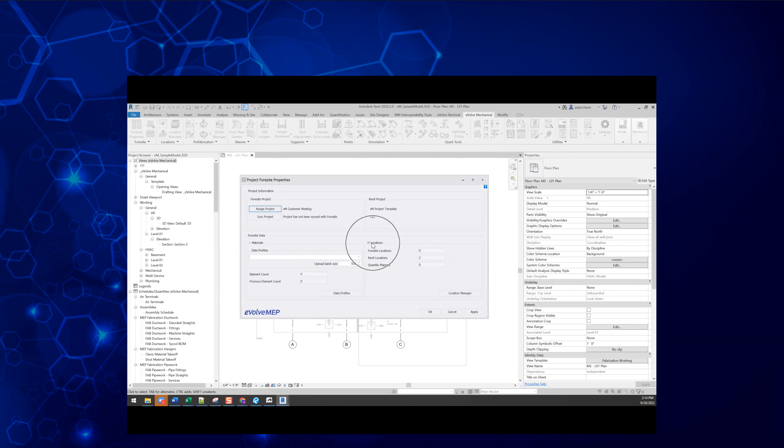And you'll see I have a locations panel here. So I'm going to turn off materials right now because I don't want to use it, and I'm going to keep this activated. And now when I hit sync project, what you'll see is I have Foresight locations, Revit locations, and quantity mapped.

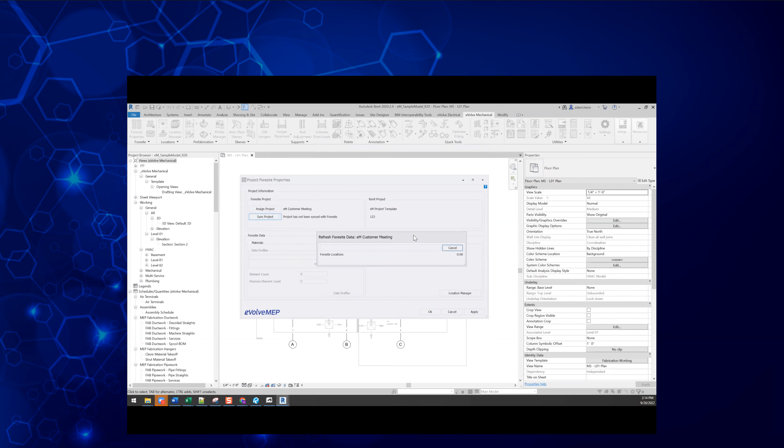When I actually sync this, you'll see the Foresight locations will bump up. So now I have 5 Foresight locations and 2 Revit locations. So what this is telling me is on the website, the project I set up, I created 5 different location zones, or however you want to think about it. In Revit, it's basically counting my locations using our location manager tool.

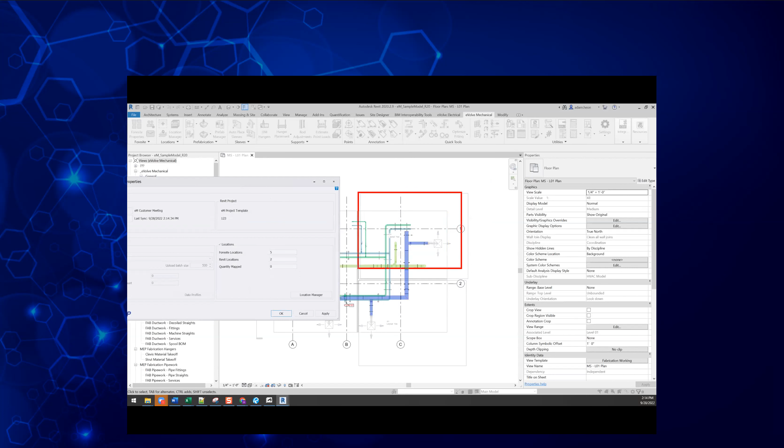So there's 1, there's 2. So it's basically saying, hey, you have 5 on the website, you have 2 in your model. The quantity mapped is the ability to connect those 2. So out of the 5 locations...

What is this? So the way we kind of map locations is in the location manager here. So we created a quick access to it. So I pull up my location manager. So you'll see in my model, I made 2 locations, which are those boxes in the background there, A1, B1. So in my mind, I probably would have called it 1A, 1B, but you know, A1, B1. So first floor A, first floor B.

You'll see with the location manager, I have a Foresight location column. Now, if I hadn't mapped anything, this would just be a blank cell that you couldn't do anything with. But now that I've mapped, I have a drop-down menu, and you'll see the kind of relationship of the 5 areas that it's saying I have. So I have floor 1 area A, floor 1 area B, 2 and 2A.

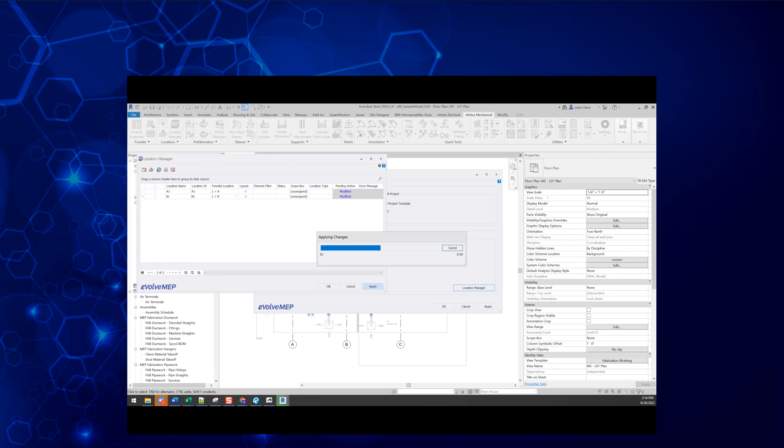So what we're doing here is basically just assigning this, like, okay, well in my model it's called A1. Well what is that? Oh, it's level 1 area A. And again, for B, it's level 1 area B. So I apply that, and now I've mapped those locations.

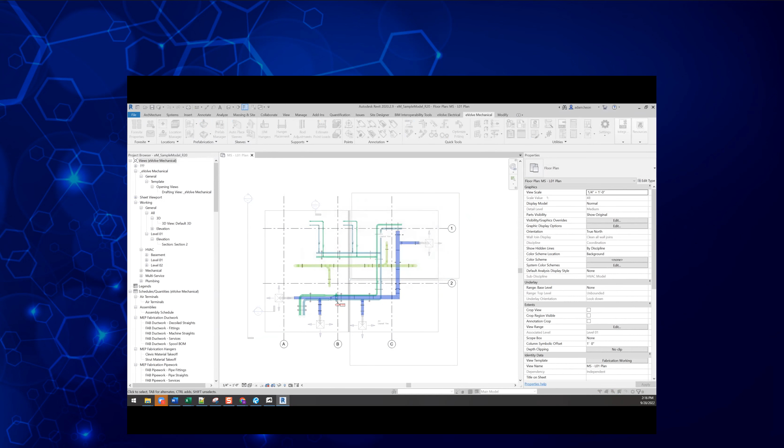So now you come back here, you'll see 2 areas of our locations are mapped. Now, once I've mapped those, in order to assign all the elements within that space, I have to use my assign location function here. So I'll go ahead and run that, and I'll just do entire project here. I get my warning, it says it may take a long time.

And they're mapped. So when I click on an element, what you'll see is... there it is. So we have a parameter.

We'll actually have two location parameters. One is the location parameter for just Revit, which is what I call B1. The other location parameter is my Foresight ID. So you don't need to use the website to do a location tool or any of that stuff - if you're using the website, we have a specific field for that. This is going to be used for sorting and filtering and things in Revit, so we're just assigning the common parameter values.

But now I have basically my A1 area here, or this is B1 area here. So all the elements are in area B, and then all the elements are in area A here, and these are just unassigned.

So now that I've assigned that, the next thing I want to do in the next area that we have access to on the website is my takeoff pad. When I come down here - if you saw what we call our Gen 1 materials app, this is very similar to that. The idea behind the takeoff pad as it relates to Revit is basically being able to send your material quantities to a grid where someone can then take them to the next phase.

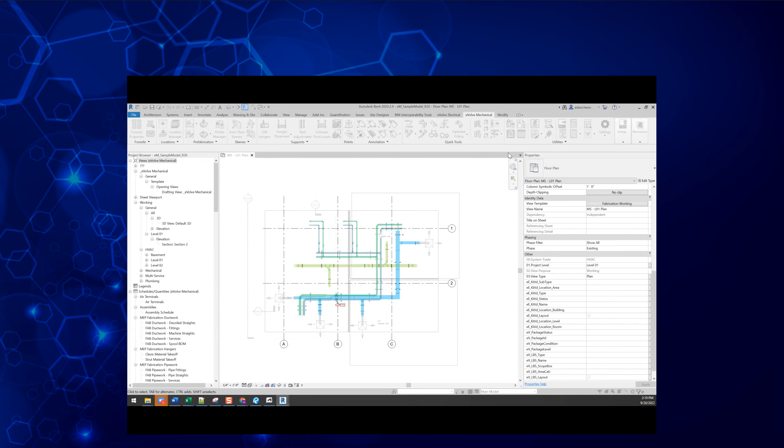So I'm not going to keep that off for right now. What I want to do is go through this profile. Just worth mentioning - I meant to say this at the beginning - the model I'm in right now is our sample project. For those who don't know, if you go into the admin module and go to your company properties, there is a download link for sample files. This is a self-extracting zip folder, and one of the things in it is a sample mechanical model that you see here. So everything I'm doing here is right from that model, and you can do it right out of the box because it's all pre-configured.

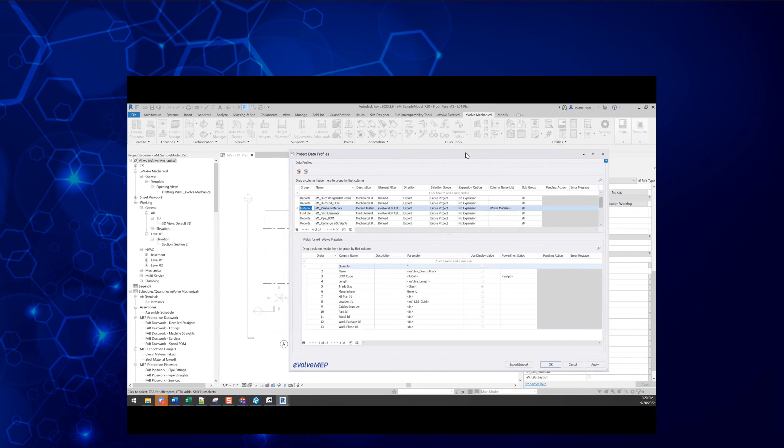All right, so back to the profile. What I want to find is my materials profile here. So just to start at the beginning, what is a data profile? What do we use it for? And what am I looking at on the screen exactly?

So think of a data profile as a way to define a container, and you can specify what elements go into that container, and then you can specify what parameters you start doing things with. So the top group here is a listing of all the different profiles. I have a materials profile here, and basically there's two main parts of a profile: your element filter, and I would say your selection scope.

You see here, the element filter is what you see everywhere in our product. It's the filter that actually tells you what elements you want to grab in this condition. So this one is just basically a bunch of MEP categories whose description is not blank.

The selection scope, as you drop down, is pretty straightforward. It's just how do you want to grab these elements? Do you want to grab the entire project, by view, by selection? Do you want to choose your method? For this purpose, for the materials profile, I'm doing entire project because I don't want to remove things - I want to send everything.

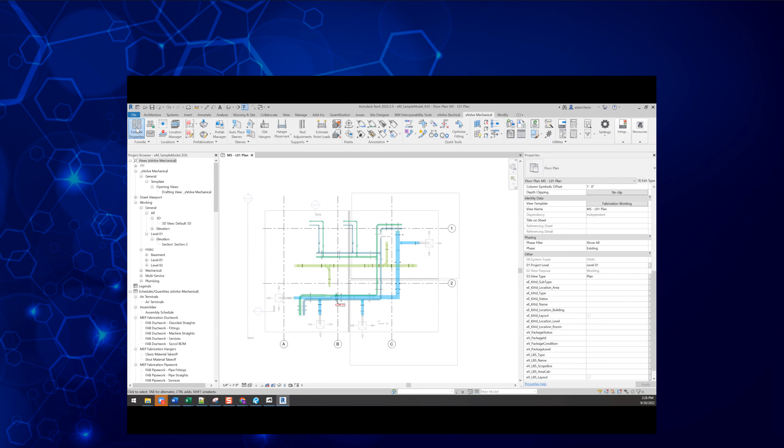I'm going to hit OK here, and go back to my Foresite properties and turn on this materials panel. By shutting these off, as you saw, it basically just deactivates them - you don't use them. If you don't set up anything on your project here, it doesn't pull anything in. If you don't set up profiles, it doesn't push anything out. So it still doesn't work anyway, but you can turn them off. So I'm going to turn on materials, and there's my profile.

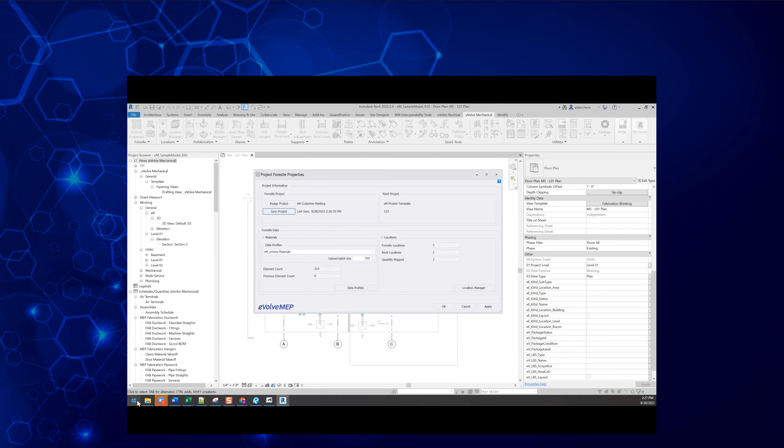I'll apply my changes, and now I'll do a sync. You'll see it'll do my locations first, and now it's coming back and doing materials. You'll see it sent 514 elements, and I'll jump back to my project here.

Keep in mind, I have to be in that project. And there's this parts list. So it processed 514 elements, but what it will do on the website is actually roll that up by description, so your quantities are totals, not individual line items. But the fields from the profile - trade size, manufacturer, catalog number - those fields are defined right in your profile.

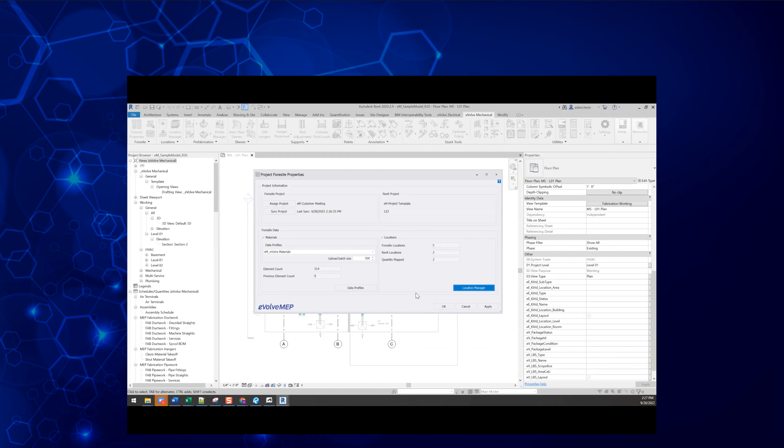So if I pull that back up - trade size, manufacturer - you'll see in manufacturer I just hard-coded generic at this point because we don't have our catalog layered in and all that stuff coming yet. So here everything just shows up as generic, but this will take any format. I just did it for the sake of putting generic there.

At this point, you can bring in all your parts, summarize them, grab these fields, and export them to CSV from here if you wanted to. Right now there are only 2 or 3 other features enabled here. Export is one of them.

You also have the ability to filter. So this is where my locations come in, and I can say let me see area B, level 1. There's my list. Or area A, which has a lot less stuff. So I'm able to filter based on my locations, and obviously more filters will be coming soon.

Again, I can export, and then the next thing I can do is map to different pads. The idea of mapping to pads is basically creating an organized grouping of elements or parts that you're going to do things with. The Revit tab is always just what's in Revit, but when you want to start manipulating quantities and adding things, you're going to do that in other pads.

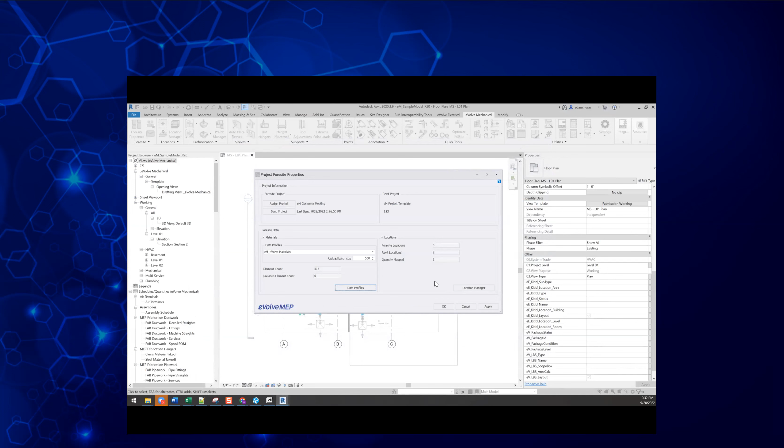But what I wanted to show was jumping back to Revit. One thing you're able to do with the profiles, specifically for materials, is assign more than one profile. So let's say you needed one for duct, one for pipe. I'll call this duct material, and I'll change my element filter here, and I'll just say this is fabrication ductwork.

I'll create another one - this is pipe material. Actually, what I'm going to do to save some time is just take the duct material and copy it, then change my element filter to pipe work. So this will not be duct, this will be pipe.

And I'll just change the... alright, let's say for duct, let me see what I want to use. Let's use... yeah, let's just use product long description for that. So for my duct item name, I'll use product long description.

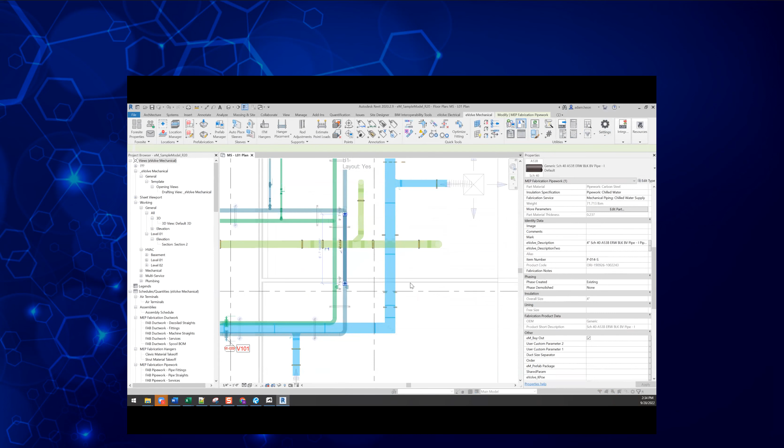And for piping, what do I want to use? I'll use something different - I think there's like a product short description, or what is there? Product... yeah, I'll do material. I'm just going to pick 2 different attributes so they're different - product material description.

Okay, so basically what I did is I created two profiles, one duct, one pipe, again being driven by the element filter. Duct profile is just duct. Pipe profile here is just pipe.

For the item name, I'm using material description and long description, just for the sake of having two different things. So I can go back to my find elements tool, grab my duct material, see what I get here. There's my product long description that I used. And if I go to my pipe material, I get all my material types.

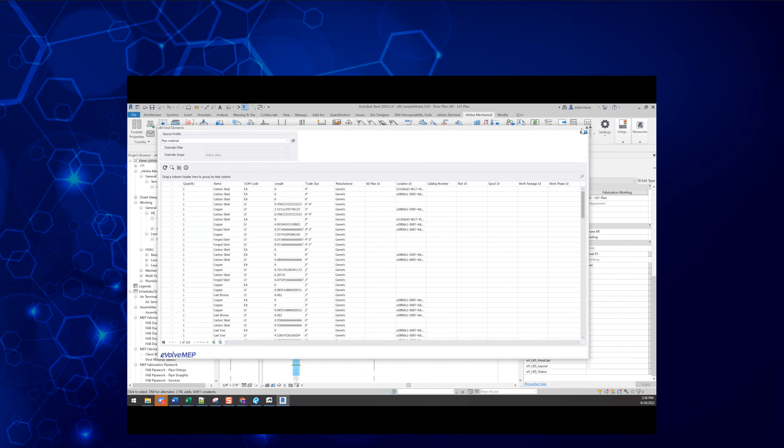Obviously this is not a description you'd want to use, but for the sake of showing two different profiles and potentially having two different parameter fields you're navigating through, you can make a third profile, say just for hangers or something, if you use a different parameter for an attribute. So I got those two profiles, and when I'm in my properties here, I can then say duct and pipe, and both those profiles will send.

So if I go ahead and sync my project, now it drastically reduced the counts because I cut down my element filter a lot.

But what I'll do is go back to the takeoff pad. And there we go, so refresh it. It's a bunch of—actually this filter is probably still applied. Oh no, it's not, it's because it rolled it up. So it's just a bunch of materials, and then there's your duct and stuff.

So pipe and duct are in here. I just used terrible description fields to do it.

Now, one thing to note on this is you'll see the list condensed. This list is always what's in Revit, and we are tracking by unique element ID. So we didn't add any new items here—we actually modified what was already there because the element IDs haven't changed from my initial upload.

Because I reduced things through my element filter, as far as the website's concerned, those things no longer exist, so we remove them completely. But any modification to items from Revit to the website is tracked by unique element ID.

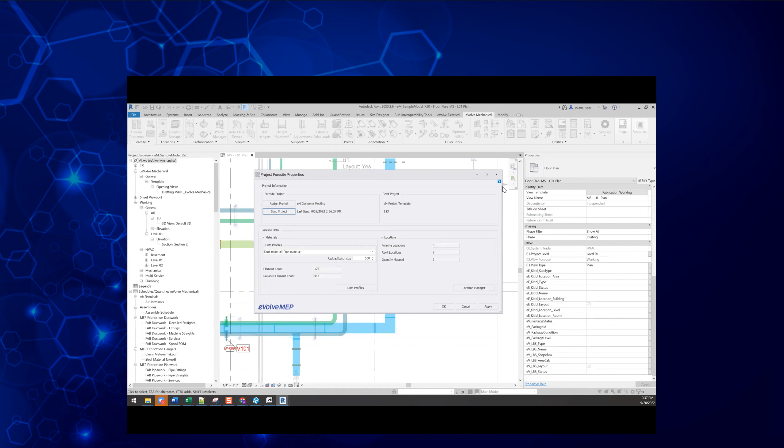But I think that covers what I wanted to show. I will leave it up for questions and see if there's any questions on what I showed, or any questions in general we can look at.

Main goal of Foresite design—this seems like a construction workflow, not a design workflow. It is, yeah, it is a construction workflow. So the purpose of the design module—it may not be the best name, but it's specific.

It's access, or it's a module that is part of your eVolve subscription for Revit. So basically you buy eVolve for Revit, you get this design module, and the design module is just going to have various tools and whatever web features that we create. The design module will have access to some of those.

So as you point out, this is a construction workflow that we're supporting. Through that workflow, people on the design side or the detailing side interact with PMs, field, prefab—you're interacting with all these different departments to do various things. So there'll be chatting tools back and forth, and ways of sending information to different people on the website. So hopefully that explains it.

But at the end of the day, for Revit users, this is your module that you'll have access to. If or when we launch these other products—if your company buys a shop product, material product, whatever—you may not get a license of that product, but you could still contribute to the bill of material, either by uploading it from Revit or refining it in a takeoff pad. So it's just a way to differentiate features to different people, I guess. Hopefully that answers it.

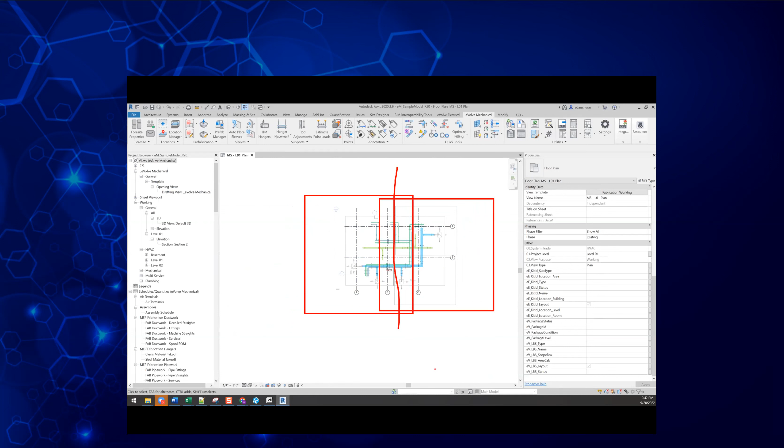Yeah, that's a good question. You can't assign scope boxes as far as using the scope box to define the boundary or the area, so we're not using scope boxes to do that. It's potentially something we could look into using. I've seen in the past, typically, people position scope boxes so they overlap because you always want that match line to show up. But the intent of the location tool here is really not to have overlapping boundaries. You can, but at some point elements are not going to end up where you want them to be. So the intent is not to have overlapping boundaries, which is why we did not go the scope box way, at least for now.

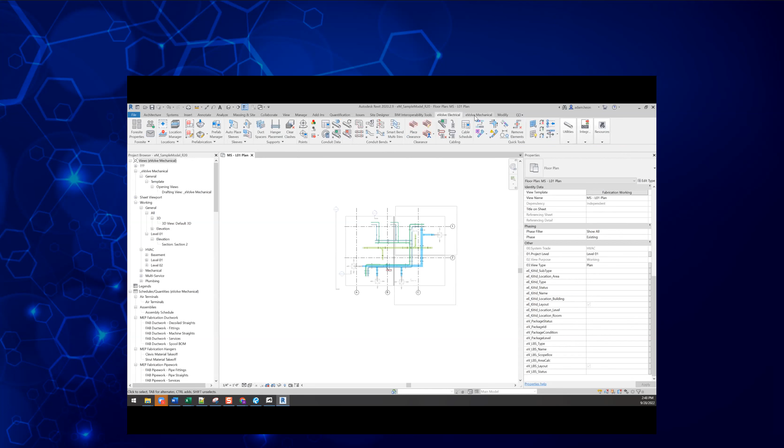So you have these two types of features. The whole purpose of the button movement was to create a standard for where we put buttons and how they look across products. So at the end of the day, when you're toggling between electrical and mechanical, there's a lot of similarity. Now when you actually look at them, all the buttons are pretty much in the same places between products.

So it was just a purpose of standardizing. We did a few other things, changing icons, what they look like, changing some button names. It wasn't pleasant, but we had to do it for the sake of standardizing the product. So that's why we did it.

Marty, you see Zach's question about getting a recording? I don't know - I assume we are sending these recordings out. I don't know how we do that or who handles that.

Yeah, I usually do that. That's a question I get all the time. I'll get a list of everybody that was on both of the webinars and send a link out, like a Dropbox link or SharePoint or something, so that you can access the whole recording.

Something too, Marty, that we should be looking into is utilizing our message center. Everybody should actually be getting messages. We haven't sent many of them out, but a few have gone out. You'll get them in Revit, you'll see the little icon here - an unread message, and basically when you click it, it'll just bring you to this page here.

So what we can do, Marty, is potentially send out that download link right through this message center, and then anybody, even if they're not attending this, they'll get it. That's a good idea. Okay, I'll note that down, and yeah, we'll test that out.

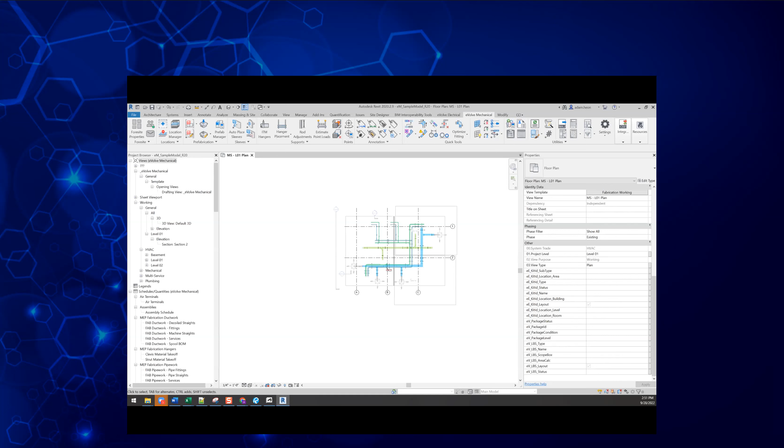Can we have one of these meetings but cover Revit tools buttons rather than stuff for the website? Yes, absolutely. Colorizer, ITM hangers - yeah, I definitely will cover buttons. I just figured it would be a good topic to cover the website, so I don't plan on spending as much time on website stuff. This is supposed to be more Revit focused.

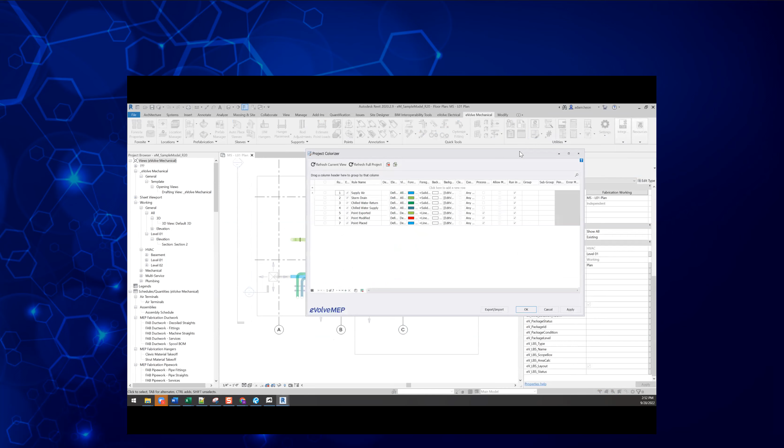Josh, I'm not sure what you want to cover on ITM hangers, but I will show Colorizer real quick. So Colorizer Tool is basically our utility that covers how you'd handle coloring through Revit filters. Typically, this is more of a different type of utility for doing graphical overrides. The difference here is it's element filter driven and view filter driven.

So what you're used to now is you create some type of color scheme, typically in a view template, and then you assign a view template to your various views. The way this would work is, let's just say here I have my supply and chilled water colors. My view control is defined here - in this case I'm just saying all views, but here I could say something like view name contains 'layout,' I don't know. But depending on how you name your views, you could trigger coloring rules based on view name.

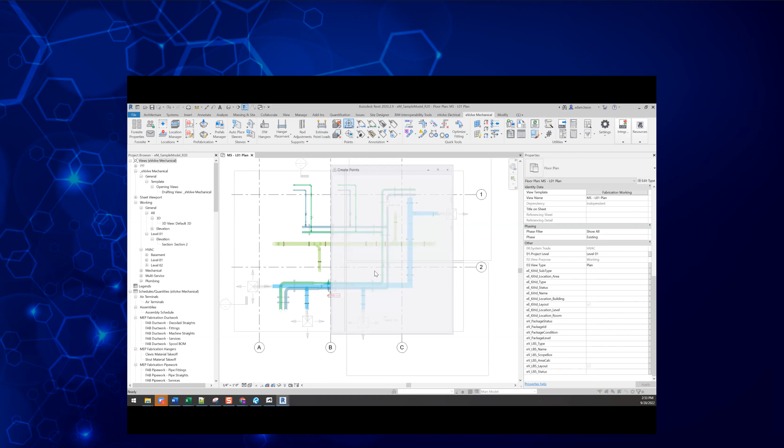So the example I usually show for what you can do with Colorizer is our points. Let me just check these - update this model. So I'll show the concept and then I can explain the rule. Say if I'm placing points here - make sure I'm in the right tool, whatever it is, test. So I'm just going to place some points and you'll see they turn blue. So if I go to my point manager and then I number these and export all my points.

All right, now I'll just export them. So by exporting my points, I'm going to automatically assign a status to 'point exported,' and you'll see the colors should change in the background.

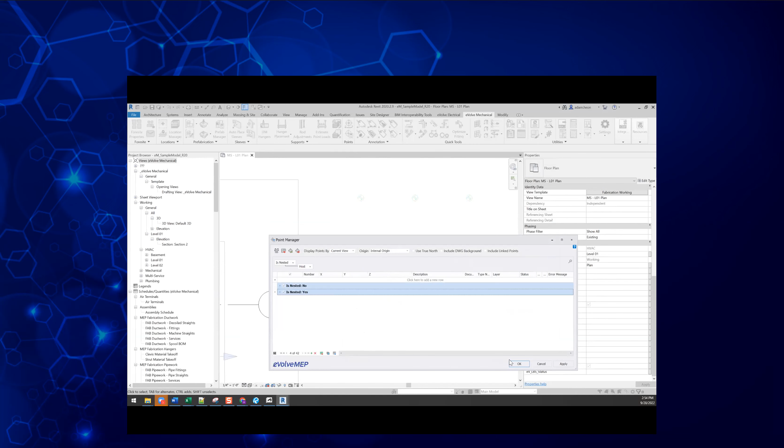And now they're green. And then if I come into this point and I move it, you'll see it turns red. So the coloring scheme here, whoops, if I go to the right tool, the coloring scheme is: point placed turns blue, point exported turns green, point modified turns red.

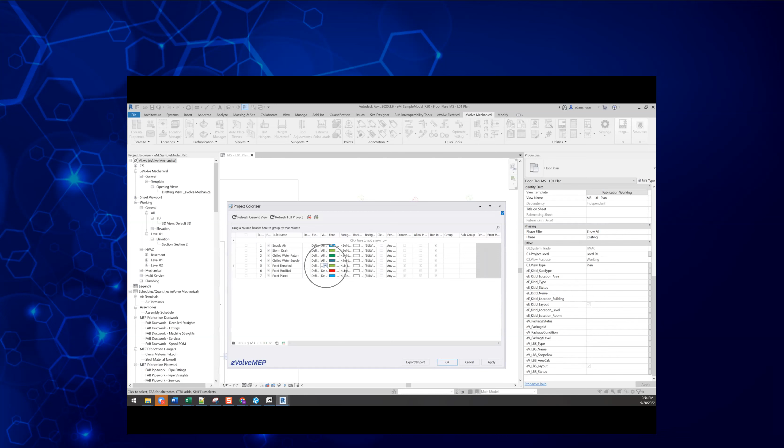And that's all being driven by the element filter. Let me just maximize this. So if I go to the exported filter here, whoops, not that one, this one, you'll see it's just isolating it down to my family, my EV point family, with a status of exported. So each filter here is basically the same one, just with a different status.

So I took advantage of our point manager, which automatically assigns statuses, and basically created a color scheme so that my view reflects those. And I can visually see now, if I see a red point, it tells me it was once exported and now it's changed, right? So it's kind of a cool visual.

Now what I could do here is on my views, this would be probably a more likely example where you have point specific views, where you have everything shut off but points or something like that. So this is where you may have like a view name that contains 'point.' So what that would do, let me just do that to all of them.

I'll just do two, it's fine for the sake of time. So if I take my level 1 view and I duplicate this. Oh, let me just clear my rules because I duplicated the view. Hold on. Come on. Oh, here it is. There we go. Okay, so now I'll move this point.

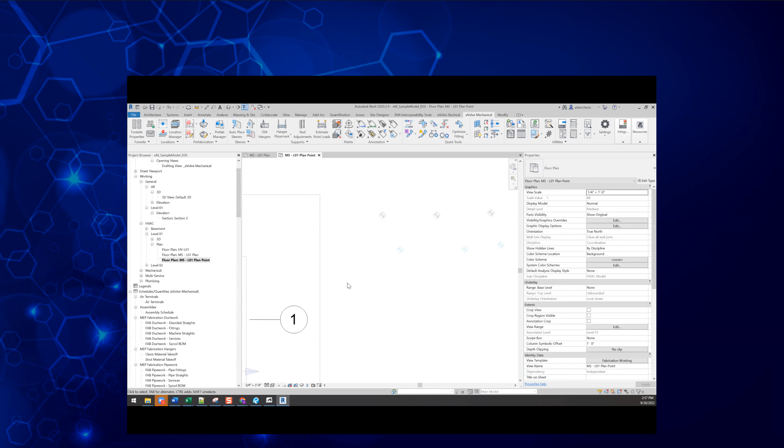I don't know what I'm doing wrong here. But for the sake of time, I'm just not going to look into it. But basically, if I were to take this and put the word 'point' on it, and then refresh the view, the colors should activate. I'm not sure what I'm doing wrong here, but I'll look into it.

So hopefully that makes sense. Again, it's a rule-based coloring utility. Define your element filter, which defines the elements, and your view filter, which defines your views, and then you can color things. One thing to note here are these other checkboxes.

So these kind of came in, I think, in 5.4, because it depends on when certain events were running in the background and how these rules were being run and what order it happens. We were getting mixed results—sometimes you'd modify something and it wouldn't color, or what have you. Basically, these features fix all that. Essentially, you could turn these all on and you won't see any difference and everything should work fine. So eventually these will probably even just get removed and we'll just keep them all on all the time. But because we were in the middle of a release, we just threw these in as options, so we didn't screw anybody up.

So yeah, love to see it. I'm going to cover each panel in the ribbon, sleeves, cover sleeves. Yeah. Yeah, I can—the suggestion on topics for next meeting, I can certainly pick a panel and cover that.